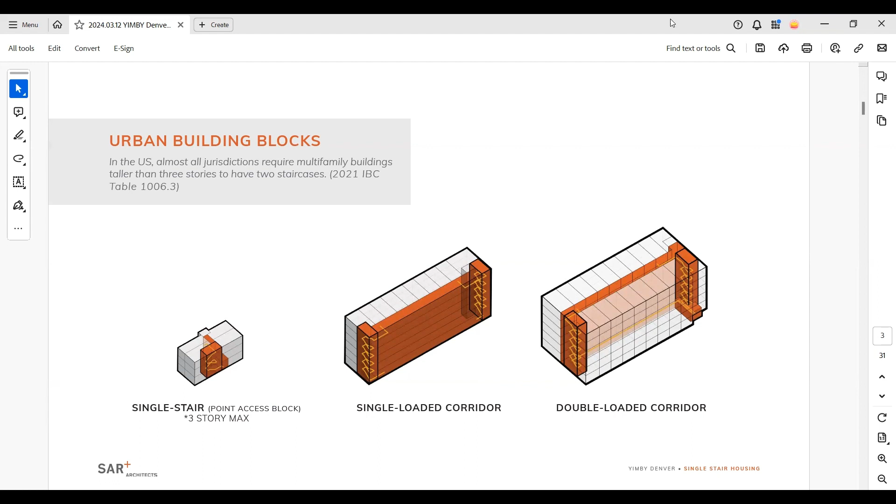Next slide, please. So what most of the world does, and what Seattle has found to be an effective housing model, is building a unique building code that allows taller single stair housing with specific safety codes tailored to a mid-rise scale apartment or condo project. And this type of project creates density on small lots, so it allows for fine-grained infill in urban areas.

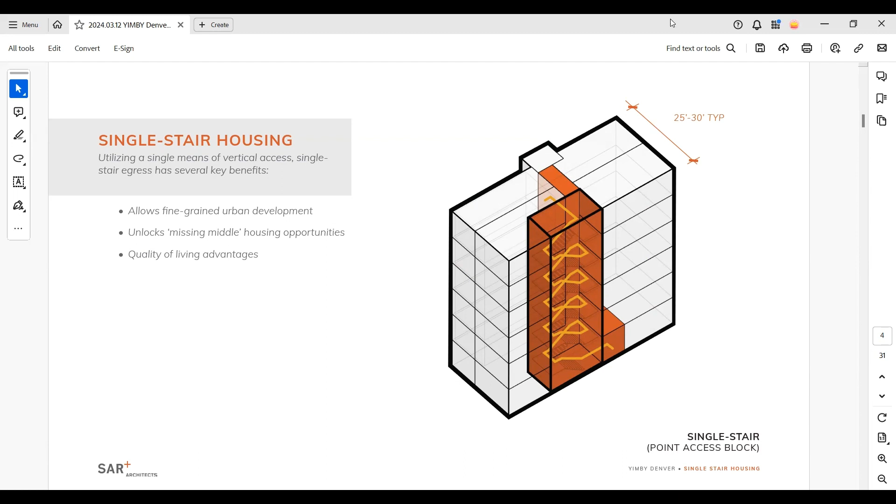It also unlocks missing middle housing opportunities by creating a variety of unit sizes centered around a single stair core. And then these buildings also have a lot of quality of life, quality of living advantages because they have windows on multiple sides.

So when you compare a floor plan of a single stair building against a double stair building, a triple stair building with a double loaded corridor, in single stair buildings the units are clustered around a central circulation core, and the floor plans are very efficient. This diagram shows a layout that includes an equal number of beds, but footprints that are vastly different. The single stair footprint is about 1,000 square feet less than the double loaded corridor example to the right.

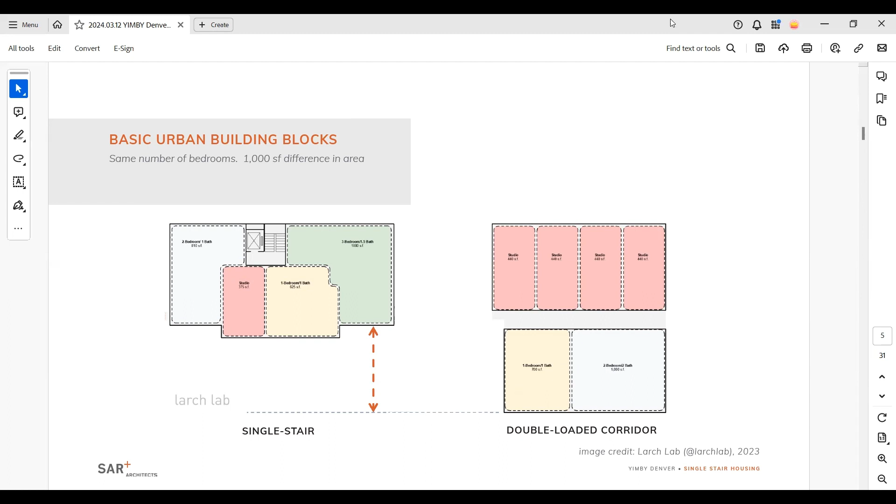And most of the single stair units have dual aspect. That means they can easily ventilate the space. They get a lot of daylight. Whereas the double loaded corridor units usually all have windows on a single side. Next.

So when looking at the rest of the world, the US is kind of at the bottom of the chain, with the lowest heights allowed for single stair housing, except for a few unique cities that have added specific amendments and safety provisions to their code that allow for taller single stair housing. And these jurisdictions have found these amendments to be safe over the decades that these provisions have been around.

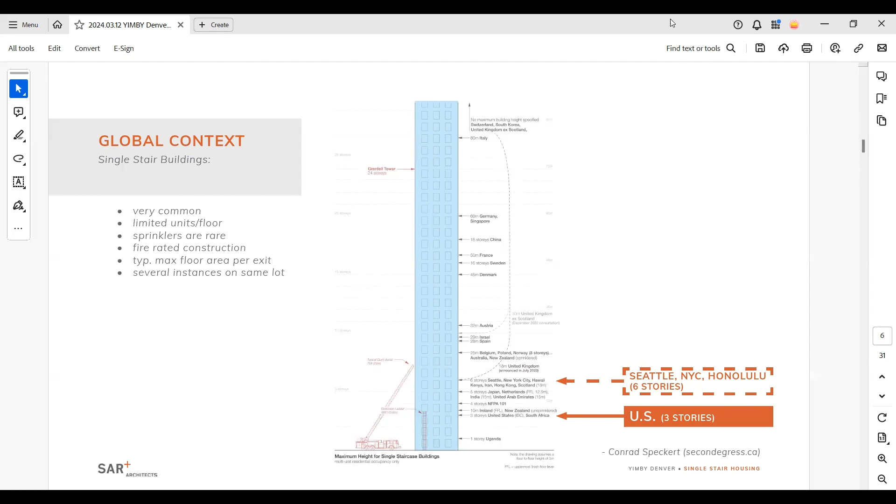Next slide, please. So one of these jurisdictions is Seattle, which has a lot of similarities with communities and neighborhoods in Colorado. Next slide. So what Seattle's done with their building code is they created what is now 14 safety provisions that are unique to single stair buildings up to 6 stories in height. So they limit the number of units on a floor, they require sprinklers, they require stair pressurization. They have a variety of safety requirements that officials have used to make for a pristine exiting condition.

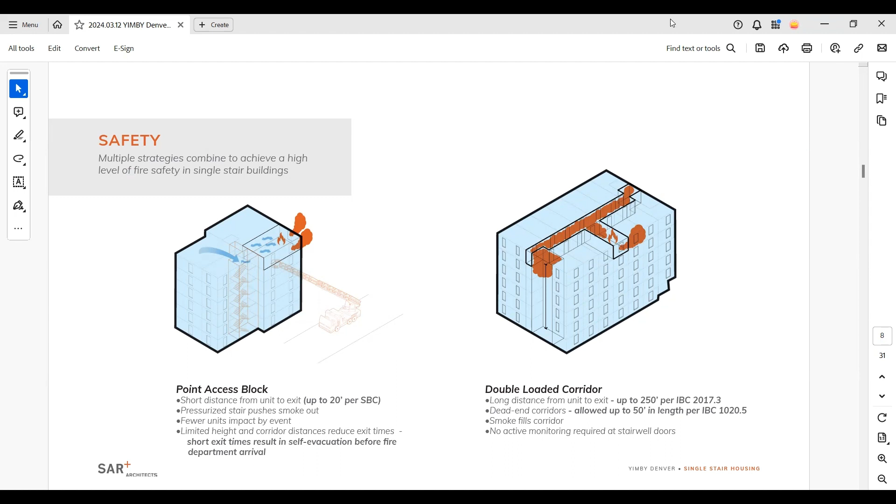In comparison, double loaded corridor buildings have a separate set of rules that apply to very large multifamily housing projects. So what Seattle's done is tailor their code to a specific scale of housing. Next slide. And one thing that comes up a lot in this conversation, which is really important to talk about, is safety. Seattle has tailored their building code to be very tight, very restrictive.

And this is a great comparison between what's allowed in Seattle at 6 stories and the Grenfell Tower, which was a tower that burned a few years back. It was a terrible disaster. A lot of people lost their lives. And that building was built with a completely different set of safety standards. That building had 24 stories, had 120 units, no sprinklers.

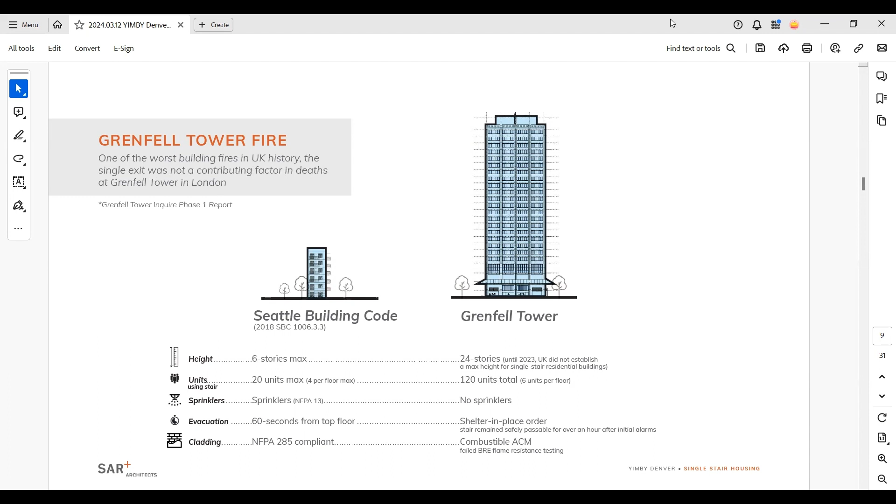Whereas in Seattle, the largest single stair building that you can construct maxes out at 6 stories in height, 20 units using the stair, along with a long list of other safety provisions. So they're vastly, fundamentally different buildings. Next slide, please.

And this is what the emergency egress plan looks like when you are in the corridor of a single stair building in Seattle. It's a very short corridor, and if you're looking for your way out in this building, you just turn around. And there's the stair, there's the rated enclosure you can get into to quickly exit the building. Next.

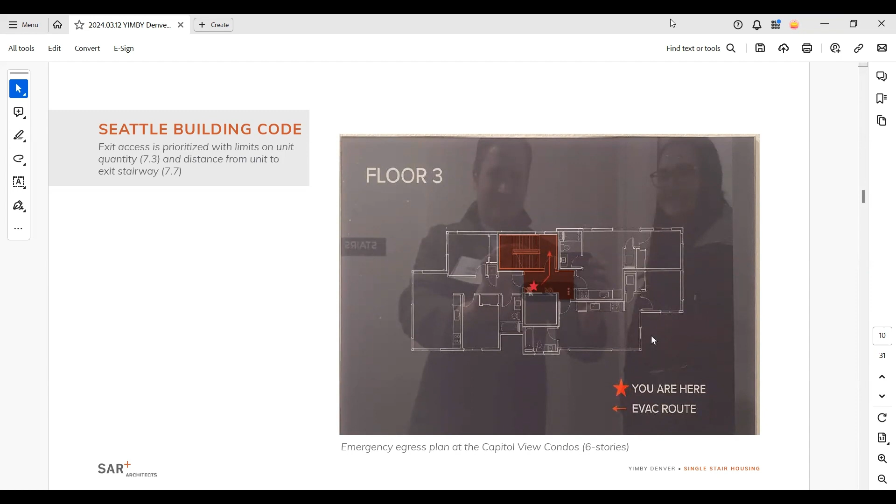So in looking at Seattle, we found that there's hundreds of these single stair buildings that have been built over the decades. And they've been built in every neighborhood that allows and is zoned for height above 3 stories. And so developers and builders have found all these opportunities to infill and create housing density in existing neighborhoods using these unique code provisions. Next slide.

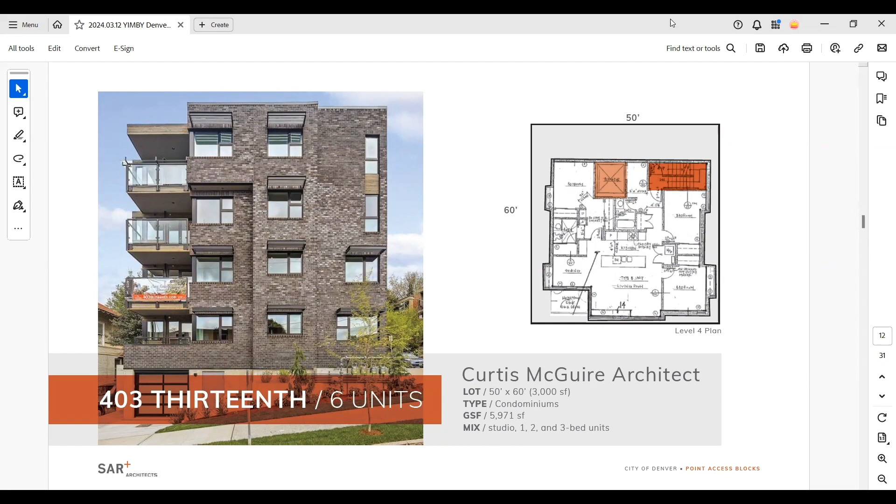Let's look at a few of what those projects look like in Seattle, and I think these projects are a great example of housing that would fit great into neighborhoods and communities in Colorado. This project is only 4 stories in height with parking in the basement, and it has a range of unit types: 1 bed, 2 bed, and 3 bed units, 6 units total, on the same street as townhomes and single-family homes. Next slide, please.

This project is a condo project that has 8 units. It's also on a diverse street. It's next to an apartment building. You can see there on the right, it's 6 stories high. On the other side is a neighboring property that's a single-family home. And this project has 8 units. All the units have windows and daylight on multiple sides. And there are home ownership opportunities on this very small urban lot. Next slide.

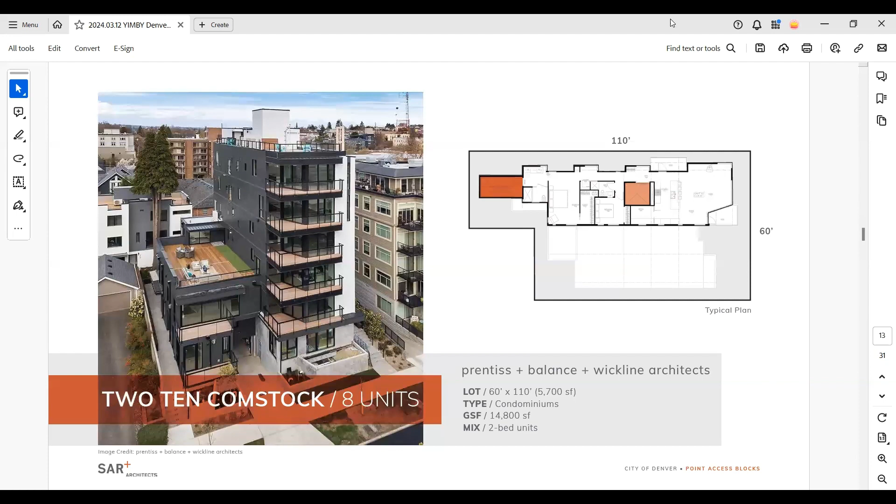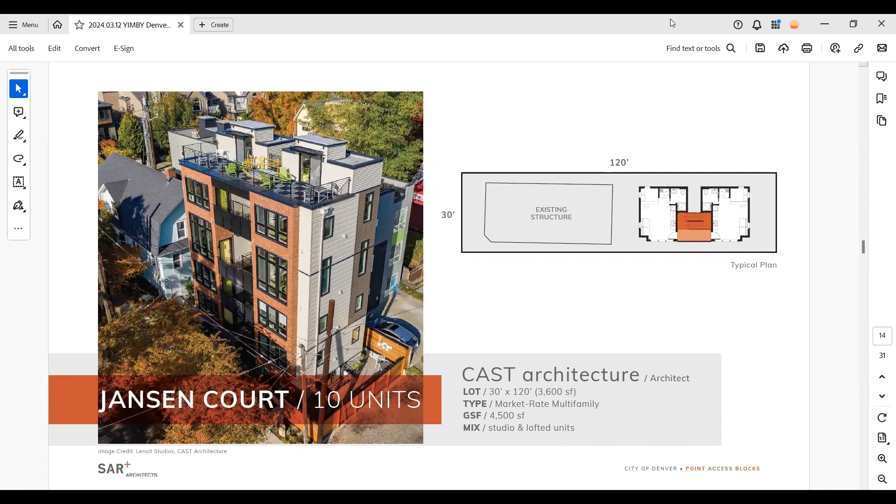But the quality of these units is great because there's no shared walls. The stair serves as a separation between the units on each floor. So you don't have any walls that are shared with neighbors, any noisy neighbors that are next door. And then you also get daylight on 3 sides of the unit. Next slide.

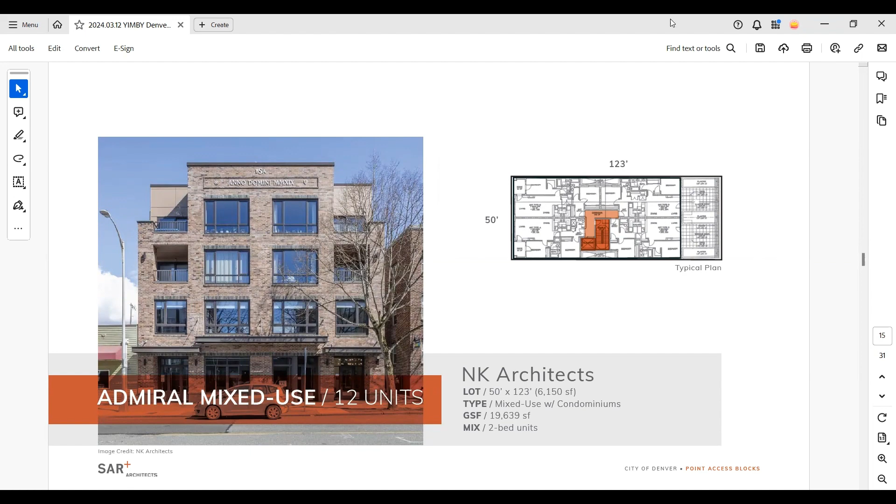This project is a great mixed-use project. The bottom floor is a preschool. The 3 floors above each have 4 2-bed units. I think a project of this scale would fit really well in Fort Collins or Colorado Springs. And it'd be an opportunity for a family to live in the upper floors and send their child to preschool on the ground floor. Next slide.

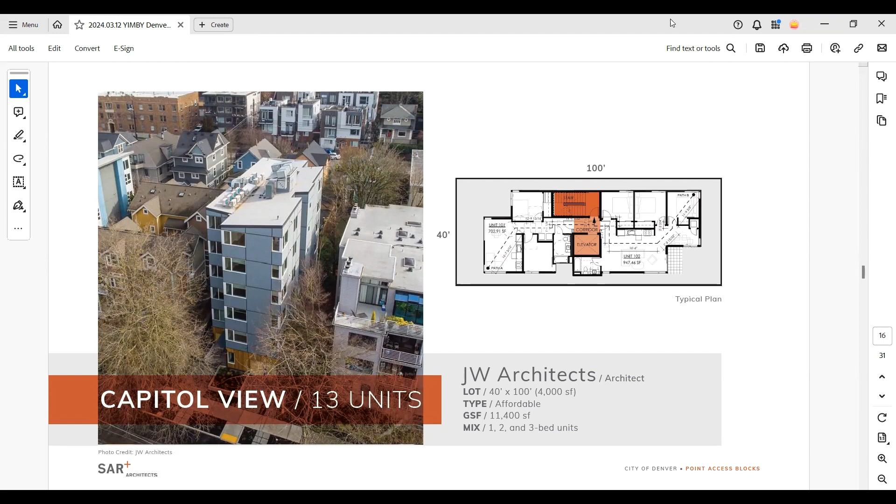This Capitol View project is another great one, and it was built by Habitat for Humanity. It's a narrow 40-foot lot, and they've added 13 units to this lot. So 13 home ownership opportunities in Capitol Hill in Seattle, a range of unit sizes, 1 through 3 beds. And Habitat has found this to be so successful that they're also developing another single stair project a few blocks away that's going to be completed later this year. Next slide.

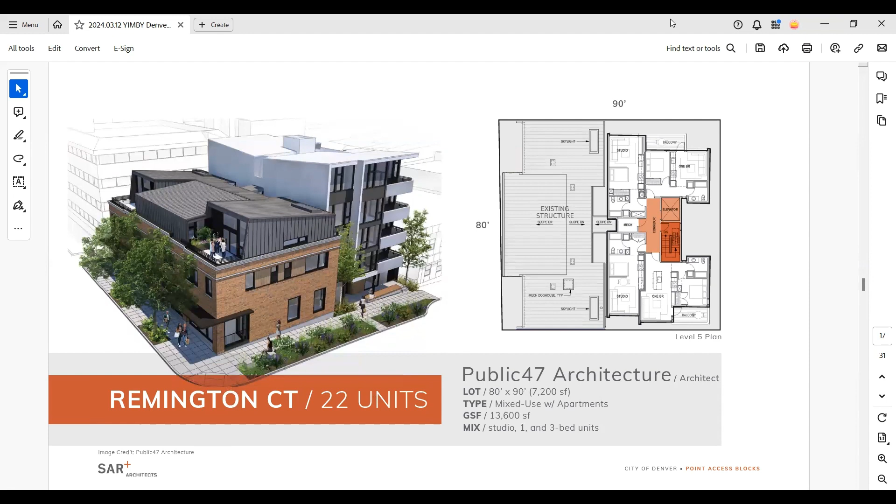This is the last project that I'll share with you. This is a project that's under construction right now. It's an adaptive reuse project where they've preserved a 100-year-old brick storefront building and integrated a single stair apartment building into it with 22 units and really activate this corner lot. And I think something like this would work really well on Colfax in Denver. Next slide.

So the last slides that I'll finish with here, taking a look at what this type of housing would look like in Colorado, in a neighborhood in Denver. This is 2 blocks in Capitol Hill. And me and my coworkers took 8 of the single stair buildings that we just looked at, put them on underutilized lots in Cap Hill, where there's currently parking. And we also used 4 single family lots as well. And we added 8 single stair buildings, which adds up to 100 units.

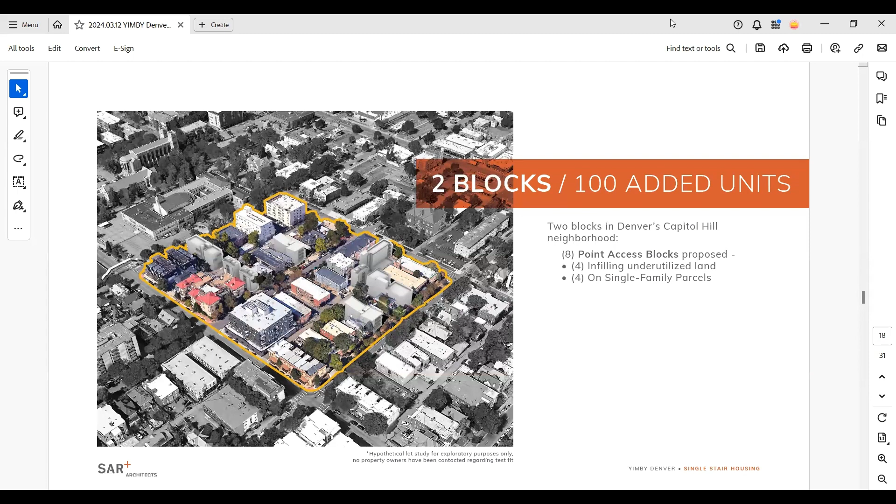And these buildings are hard to spot in this aerial rendering. They're in black and white, but they're hard to spot because they fit with the existing scale and character of the neighborhood. They fit on the same street that has single family homes, townhomes, large apartments. Next slide. So these are where the projects are that we dropped on these lots, and we used a variety of different housing types from the precedents that I just showed you.

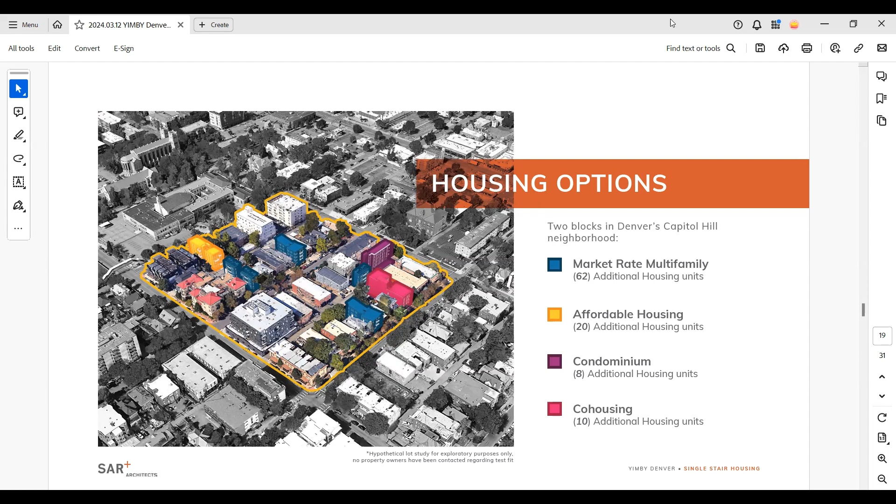And it shows how right now, under existing zoning in the city, we can have housing options if we simply amend the building code. Density is already encouraged, and housing opportunities like this can exist if we wanted. So that's kind of my segment, showing you what it looked like in Colorado with single stair housing. I'll hand it over to Peter.